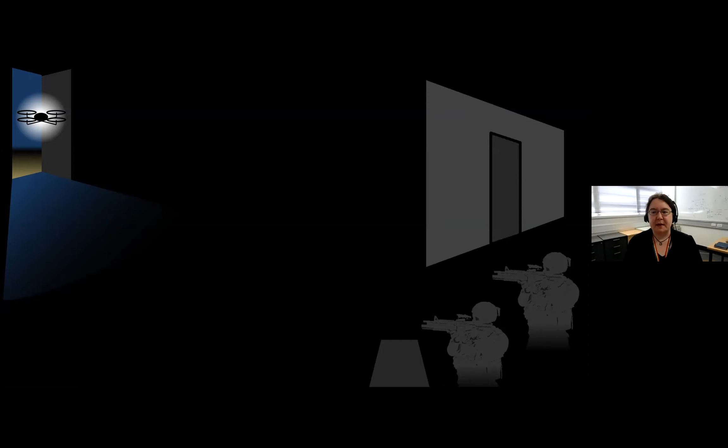Excellent choice, one that I certainly prefer myself. But this is a more complicated scenario than some of the sanitized approaches we may be used to. For instance, there might be obstacles and cover hiding our targets. There might be walls, doorways to navigate, branching corridors to deal with. We might have furniture and other obstacles in the space. And if it's a tactical scenario, there might be smoke or gas or some sort of particulate obstruction. All of this becomes very difficult, very fast.

We have a complex, compact, sensor-denied environment. There's no light, limited vision, no map, no GPS, and very little time to think. You're not just dealing with a room that needs to be mapped—you have an alert and non-complacent adversary. Your opponents will actively respond to try and stop your drone incursion. So your unmanned system has to be both smart, capable, and prompt.

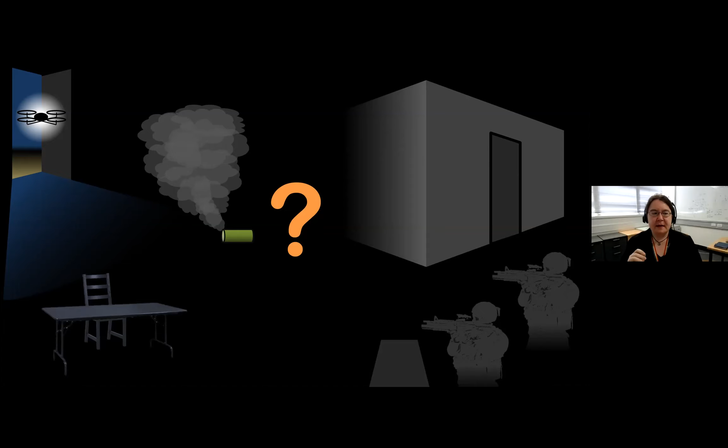So the intelligent approach to this, of course, is to festoon sensors onto our drone. A plurality of sensors: scanning LiDARs for mapping, cameras for object identification, radars for navigating through smoke and particulate obstacles. All of that requires heavy-duty computation—multiple core processors with dedicated pipelines for computer vision, tracking, SLAM, and person recognition for when we find one. This requires a seriously capable platform.

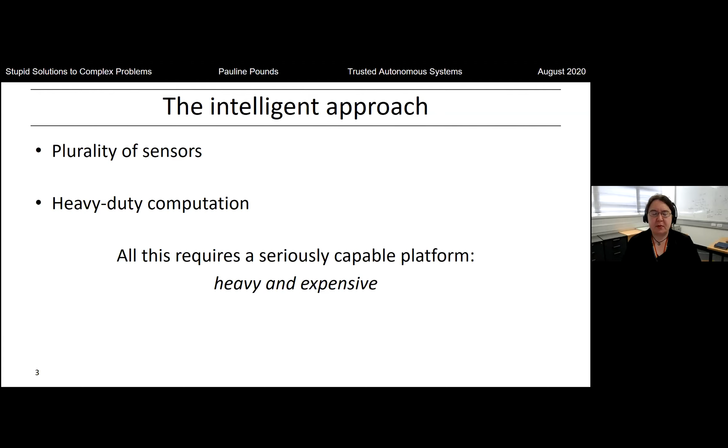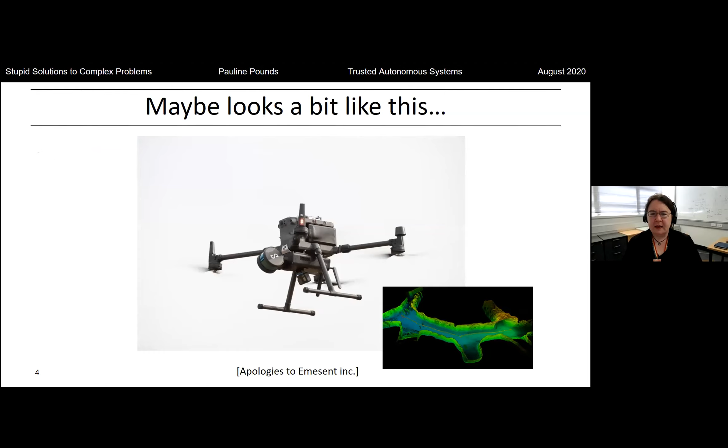This is going to be heavy and it's going to be expensive. And with apologies to my very good friends at Emesent, you might think it would look a little bit like this—a fairly large and quite high dollar figure drone, but extremely capable. It can navigate autonomously and give you exquisite maps that tell you everything you ever wanted to know. The problem, however, is that even with an intensely capable platform like this...

It can still potentially be defeated by a hippie bead curtain, because your LiDAR didn't pick it up especially well. You weren't sure if it was fog, some sort of cable, or a clear pathway you totally didn't detect. And now your $200,000, $250,000 platform has been brought low by something you can buy for $2 at the local op shop. That's not a great look, and it's very expensive to learn that in the field.

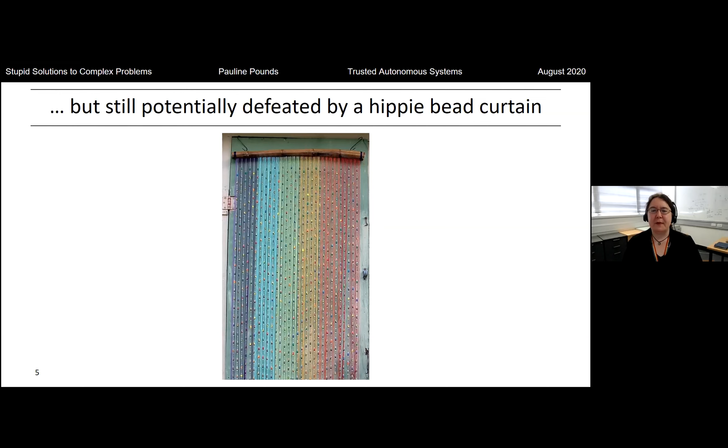As technical people, we like to think we can solve all problems just by building really smart robots. And that's a great approach to take in general, right? It's safer, faster, less expensive and less risky than putting a human into that room. Fantastic. And there's sort of a bit of a conceit that we have that more intelligence equals more better.

But intelligence has drawbacks too. It's expensive to design, build, implement, and operate systems with high intelligence. Computer systems are heavy and fragile—they very rarely like to be dropped. And they're also potentially brittle to unforeseen circumstances. If you haven't programmed it in before the mission starts, it's very difficult to build a system that will be flexible and adaptable on the fly. That's one of the key topics robotics is addressing as a field these days.

So, okay, well, this is a really hard scenario. And we might be tempted to say, cool, some problems you just can't solve, right? Case closed, great, see you at the coffee break. It would be a really short talk if I thought that was the case.

So I'm going to switch it up a little bit, and I'm going to introduce you to a friend of mine. It is humanity's deadliest predator, because we kind of know that there's a solution to this problem. And here he is, there in the center of your screen. I don't know if you can see him—we'll draw a line around him there. There he is. You might be familiar with him, in fact. He's got 100,000 neurons. He's killed billions of humans.

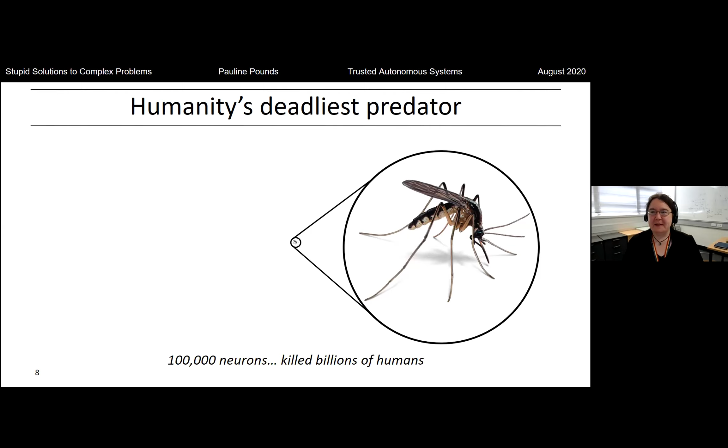In fact, by some reckoning, mosquitoes have killed about half the humans who've ever lived, through malaria viruses and parasites, which is a heck of a thing for a flying platform. I mean, that's really good value for money.

But no one would say that a flying insect is smart. Even at the low end, our good friend the Aedes mosquito has 100,000 neurons. Slightly more complex, but with roughly the same number of neurons, is Drosophila, the fruit fly, which also happens to be the most complex connectome that science has completely mapped.

Slightly more complex again, although I haven't found an exact strict number for this one, we have the common housefly, which is 250,000 neurons. But the intellectual heavyweight of all these flying insects is, of course, the honeybee, with just shy of 1 million neurons. But by no measure would you say the honeybee is a smart platform, not compared to humans.

Human beings, for reference, have about 86 billion neurons. So there's a bit of a step between the two. But some food for thought.

Have you ever tried to swat a housefly and missed? Your brain is massive compared to that of a housefly, and yet try as hard as you might, you just can't get the thing. And I'll give you a hint: it's not because you're physically incapable of doing it.

A housefly typically flies at only about 7 kilometers per hour. That's a brisk walking pace, right? You can get there if you're on target. The answer as to why you can't is because not only are they extremely maneuverable in their flight patterns, they're also much faster at thinking and reacting than you are. Very fast sensing, very fast response. And they're cheap, because flies are everywhere, much as we wish that they weren't.

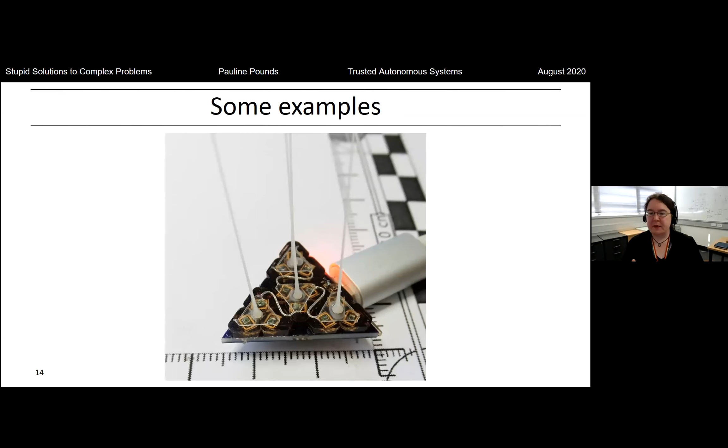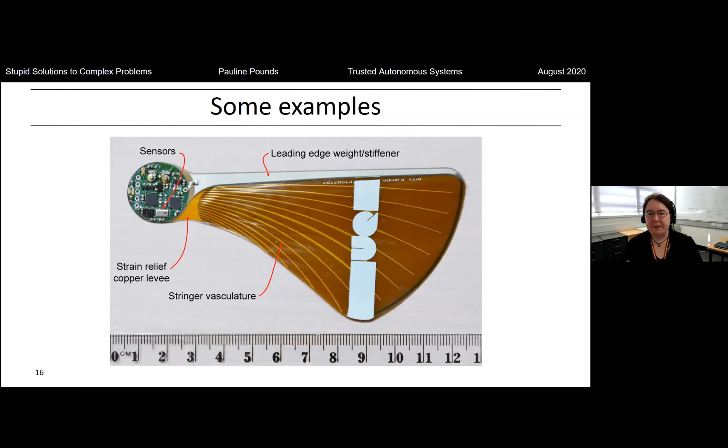I'd like to give you some examples of the systems I'm developing that encapsulate this style of thinking, focusing on the physical end of intelligence embodiment. Some examples are contact whiskers for measuring the environment around you, rotor sensors for measuring velocity of aircraft through the air, disposable drones made out of integrated circuit material, and as a bonus topic at the end, bipedal locomotion, where we solve a difficult, complex embodiment problem by simplifying everything down to its elements.

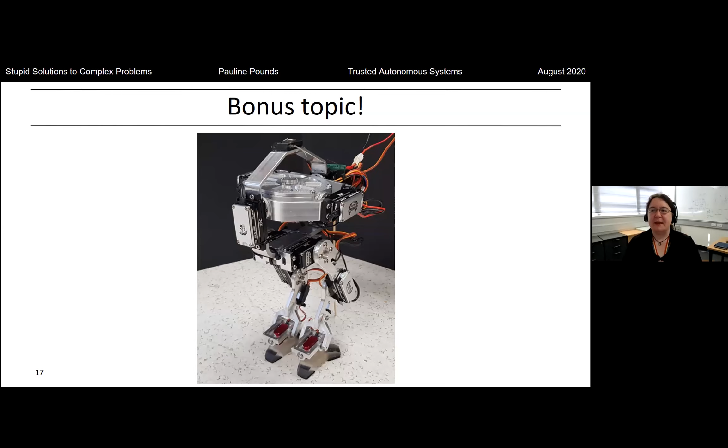So I'll go through them one at a time, starting with my whiskers, contact and pre-contact sensors. I like describing whiskers as reaching out and touching someone without necessarily having to be close to them. Contact proximity sensing is absolutely critical for robots moving through an actual physical environment.

If you're in a cramped and cluttered environment, contact with something may result in a risk to the robot. There are lots of natural examples of autonomous systems using whiskers to navigate through compact spaces, find prey, sense vibrations of potential adversaries or food, measure the velocity of an animal through the water, and even measure the angular velocity of a flying insect with a specialized type of whisker called the haltere.

For drones, we're very interested in using these capabilities because they give us a way of getting fast, early sensing about a potential contact when that contact force will be low, rather than during a hard contact where the contact forces may be high and damaging.

Our goal is to navigate our microscale aircraft, about a 20-gram platform, through dark, dusty, cluttered environments where heavier sensors are simply not going to be a feasible approach.

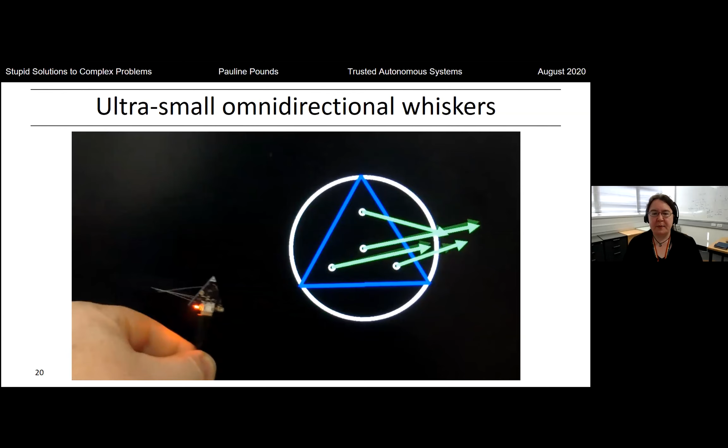If we succeeded in it, it might look a little bit like this. It would be nice if we had the capability of contacting surfaces and getting a measurement back from our device, giving us orientation and relative contact force. It would be great if we could do that as a complete array of sensors giving us not just an individual measurement, but a collective force flow field for the environment we're in. It'd be even better if we could have some kind of visual feedback to the user that we'd be able to make sense of.

Of course, interpreting that information for a robot is an additional task on top of that. So that seems a bit unrealistic, but we'll give it a go.

So how would we build something like that? First, you need to measure force somehow, and sensors that measure forces can be an excellent way of capturing that information. But the problem is how do you translate a physical contact with an environment into an electrical signal you can measure? This has been a topic of study for roboticists all the way back from the 70s. Some very clever people at Harvard University, working with Rob Howe, hit on the reality that force over area is equal to pressure. We already have really good sensors for measuring pressure, and they're called barometers.

In fact, we use barometers in drones all the time to measure altitude. So they figured, why not take some of these sensors and see if we can turn them into a force sensing device? It was a great idea. We took that idea, realizing they were onto something, and ran it to its logical conclusion.

We got a very small MEMS die. Rather than just being a barometer, we exposed the die itself and embedded it within a flexible medium. Here you can see a Bosch BMP280 MEMS barometer. The little tiny green thing in the center is the pressure transducer itself, gold wire bonded to a circuit board material underneath that gets soldered to the rest of your circuit. Normally these come with a little protective housing, but we've removed that. They are really tiny, on the order of about 2 to 2.5 millimeters a side.

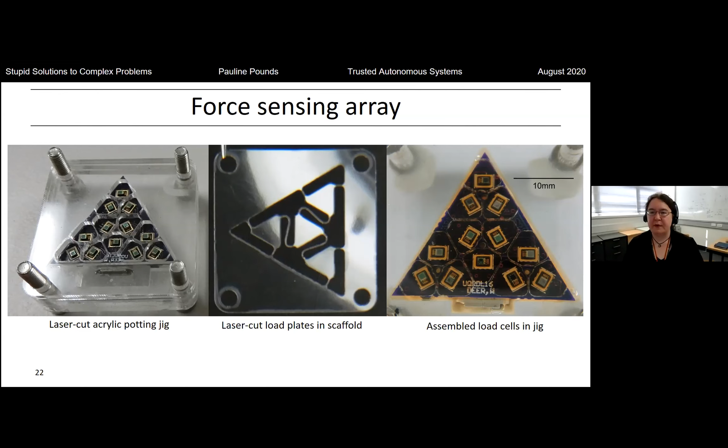To have some whiskers, we needed to come up with a way of fabricating easily controlled flexible polymer material that we could bond to our load cells, with multiple different lengths that we could control. And it's important to control not just the length, but also the thickness of the material.

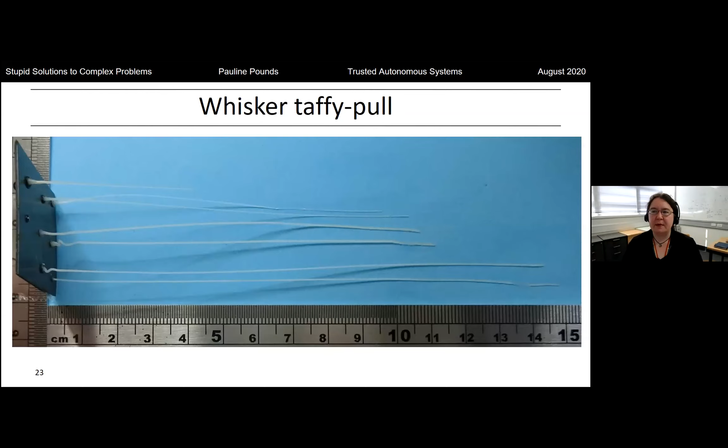Our solution for this was to modify a 3D printer to act as a bit of a taffy-pull machine, for those familiar with pulling taffy, where we put a dollop of hot ABS plastic on the load plate and then draw the head away from the surface. That causes the plastic to stretch out and become thinner and finer as it moves away from the base. This way, we're able to get very repeatably 0.4 millimeter thick fibers.

Now those little load cells are great, but to get the most out of them, you really want your fiber to be acting as an amplifier. So our configuration is to put that fiber right in the middle of our tripod configuration.

Each of our pressure elements is able to measure really minute forces, but we can always increase its sensitivity by making the whisker longer. The way that works is we have our MEMS pressure transducer inside the potted polyurethane material. The encapsulation is about 1.5 millimeters thick. That's all loaded onto a circuit board, itself about 1 millimeter thick. There's a microcontroller underneath that takes all the signals and does the processing. And there's a load plate that sits on top.

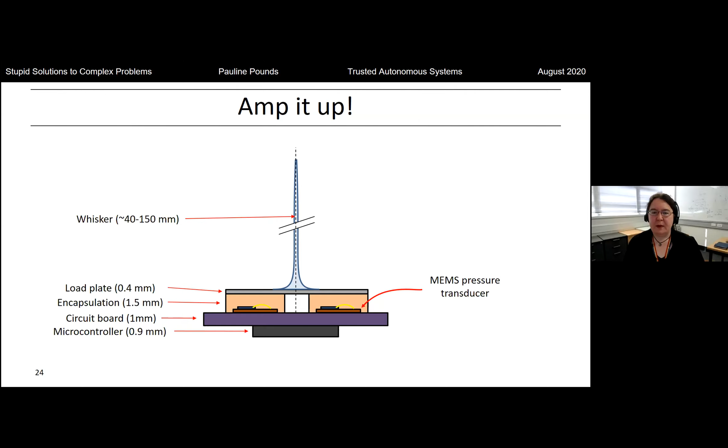Our whiskers will be about 40 to 150 millimeters long. So when we add forces to the tip of that whisker, it will translate that load into a pair of force moment couples acting on the load plate. Since we know the displacement of the fiber from the center is about 4 millimeters, and we have, say, a 40 millimeter long whisker, that gives us about a 10 times transmitted force coupling. Longer whiskers will give you higher force readings for smaller applied forces.

Now, these fibers wouldn't be much good if they just contacted something once and broke, so we decided to torture test them. We've tested them on a special machine we configured just for this type of testing, where we've basically taken our fibers to 1 million cycles, 10 to the 6, of just poking the fiber over and over and over and over.

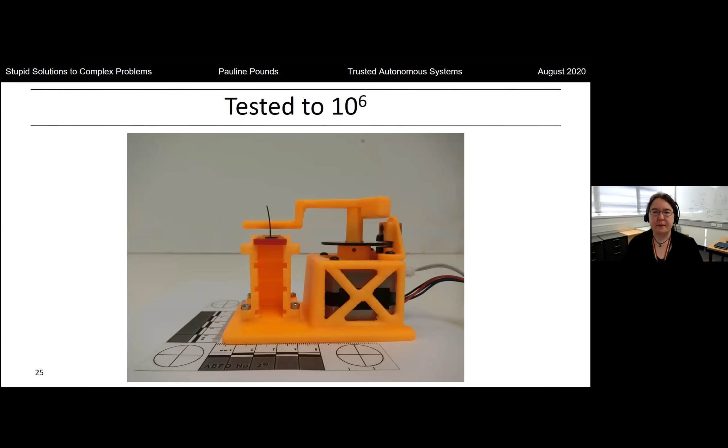So we can use these sensors to measure the small forces acting on the fibers as they move through air. This is something very important for our application with drones. So we've implemented a whirl tower, which is just a rotating swing arm that circles around with our whiskers out there on the tip, moving at about 6 meters per second.

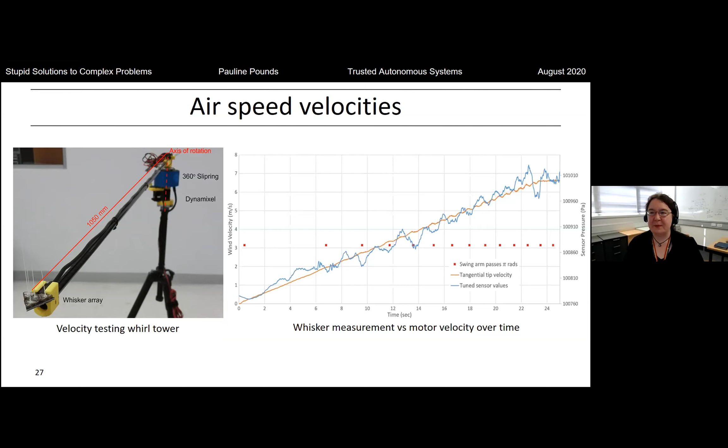You can see that the dips of all of those cycles line up with the swing arm going past pi radians, so we think we could calibrate that out and get a smaller oscillation. But it's really interesting to see we're actually measuring the mass of our own minute fibers as much as we're measuring air. Overall, the trend is nice and linear.

These things are also sufficiently sensitive that we can do some interesting, what I'd call a party trick. If we set our whisker up to cycle around and swing past our fiber, that swing arm now has a load plate on it. When the bow wave of air being pushed ahead of the plate strikes the fiber, it will read a deflection in force.

I'm going to play that again. So here it comes, and even before it contacts, it reads the threshold value and turns on its light. It can measure that incoming contact about 0.063 seconds before it hits, and that's fast enough for your drone to take some sort of evasive action or apply a safety mechanism.

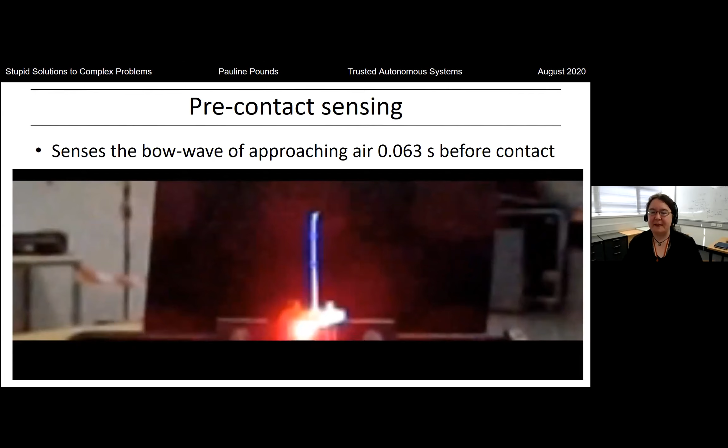So this is just a very first attempt at it. We think we can do better. But I think it's kind of interesting to see that as a proof of concept, we're able to actually measure contacts without contacting anything at all.

So how would we use this? Well, proximity contacts of actual touching objects in the environment, pre-contact sensing, and flow fields—that's a whole bunch of information that you can pass back to a pilot or process through an autopilot in order to do obstacle avoidance.

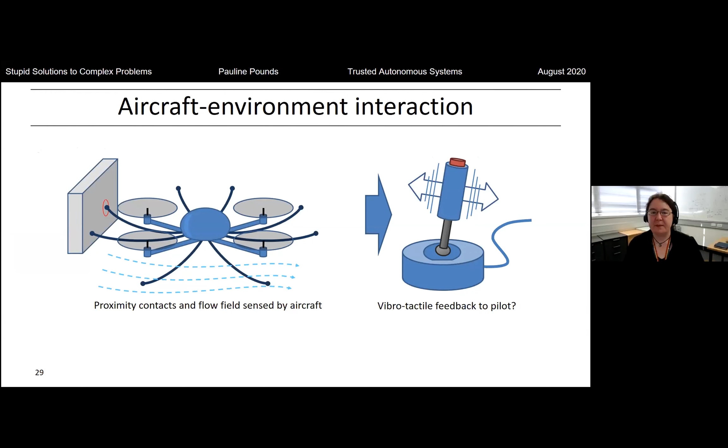And that's the approach I'm taking to some of the work that I'm doing with the fellowship with TAS. So it's good value for money as well.

It's only $30 for these tiny little systems. They're not very difficult to put together, and there's not a lot of meat to them. At 4.3 grams, even the smallest drone is going to find that pretty easy to carry around. At $30, that gets you 4 of these sensitive whiskers. It gives you USB and UART interface measurements at 150 hertz, with 13 discrete sensor measurements—the 12 of the tripods plus an extra one for thermal calibration.

You could expand these to massive arrays of thousands of these modules. Basically, you're limited only by what can be supported by the USB interface. So you can coat your whole house with them, or perhaps your jet trainer if you wanted to measure incipient stall on the surface of your wing, so that your pilots in training can be informed that they need to correct before they actually put the aircraft into a dangerous configuration.

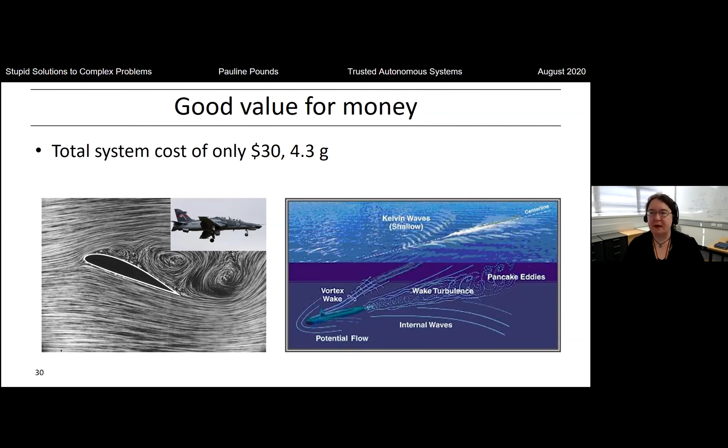Or you could put them all over your submarine. That's pretty important if you want to be quiet, if you want to navigate in turbulent waters and you don't know which way you're being moved. Being able to capture that information with a high degree of precision is something no one has the capability of doing at the moment.

All right, moving on from there, I want to talk about rotor force sensors, which are a very similar concept, trying to do a similar task, but using a very different approach to how you understand the forces in the environment. People who work in drone flight control will be aware that the fundamental task of any drone is controlling your position, your velocity, and your acceleration.

Everything else you do in terms of your mission or your higher order operations depends upon your ability to keep yourself on trajectory. That requires you to be aware of things like gust rejections, wind acting on your aircraft to push you off course. And if you can't do that, it's not very difficult to go from a meter away from a building to being against that building and in pieces on the ground.

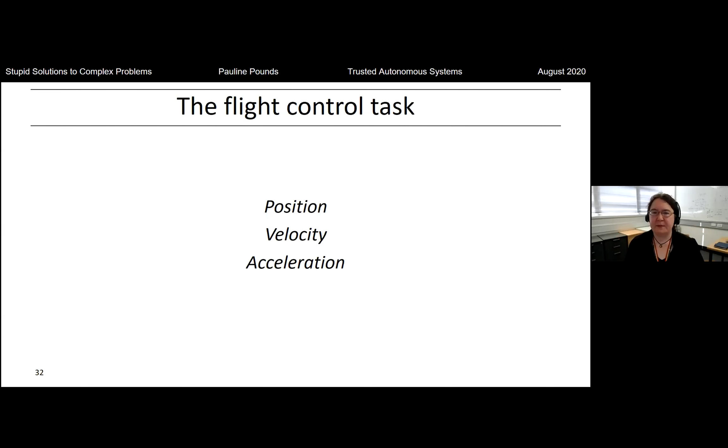It happens very fast. So the gold standard, the state of the art for aircraft navigation like this is what I call the big pink cheating room.

The big pink cheating room uses a whole bunch of beautiful IR cameras that flood the area in specially structured light, captured by an array of receiving elements that take reflections from optical markers put on top of your aircraft, and turn them into a spatial estimate of your position within that volume. From that you can get velocity, from that acceleration. It's very fast, about 1 kilohertz, and very accurate. It's really the ground truth for any experiment you do with this.

And that's fantastic, except that it doesn't work outdoors because we are defeated by our old adversary, the sun. It turns out the sun is an enormous infrared transmitter, and if you have a sensing technology based on infrared light, you're going to struggle anytime you aren't indoors, under heavy cloud, or at night.

So how do we work around this? It's great for fancy YouTube videos, but most of what we want to do is outdoors and very often in the day. And unfortunately, there's really no good alternatives.

There's no what I call universal sensor. GPS is great for getting you position, but it's slow and a little bit imprecise depending on what configurations you have and how much you're prepared to pay. It's also unreliable because if you're flying in urban canyons or under heavy cloud, you very quickly run into situations where you're just losing your lock entirely.

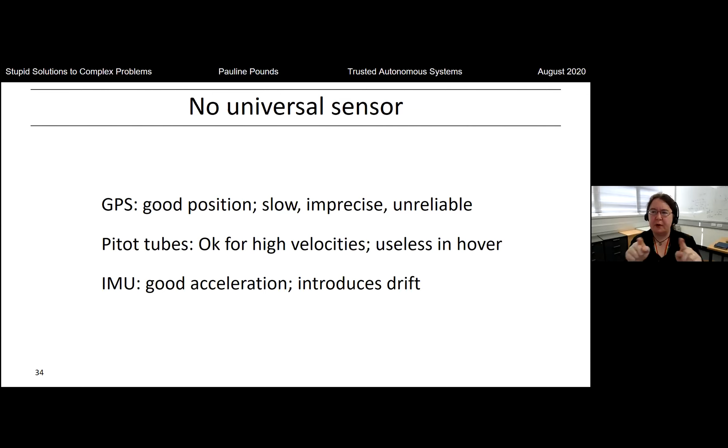Well, all right, there is a relationship we can use though. If we have position, we can differentiate for velocity. If we have velocity, we can integrate for position. If we have acceleration, we can integrate for velocity. If we have velocity, we can differentiate for acceleration. So really, if we have velocity, we can get both of those with only one dynamic order step. What we want is a velocity sensor, I think.

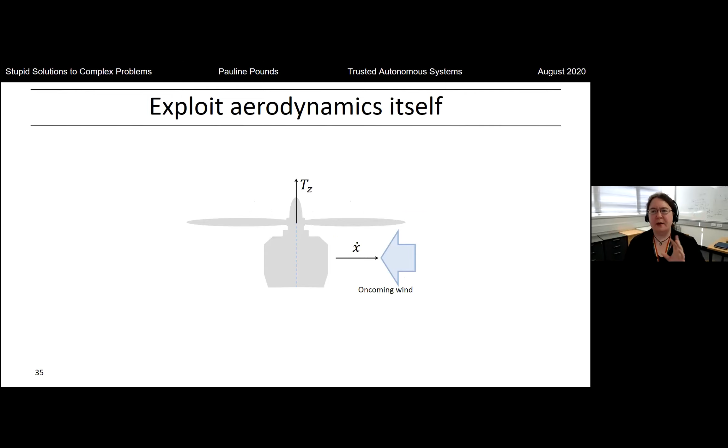What if we exploit aerodynamics itself? When you have an aircraft in hover, your rotor provides thrust that keeps the aircraft in the air. If we have a lateral velocity through the air, it's going to push back against the rotor. We know from aerodynamics models developed for multi-rotors that there's an equation linking the lateral force acting on a rotor to a bunch of parameters based on our thrust and our translational velocity.

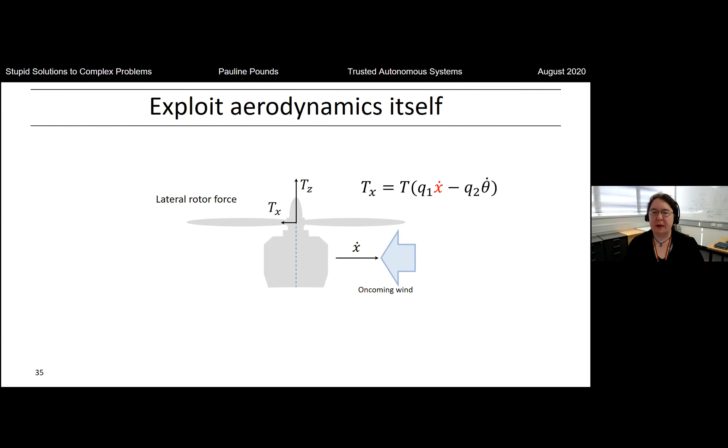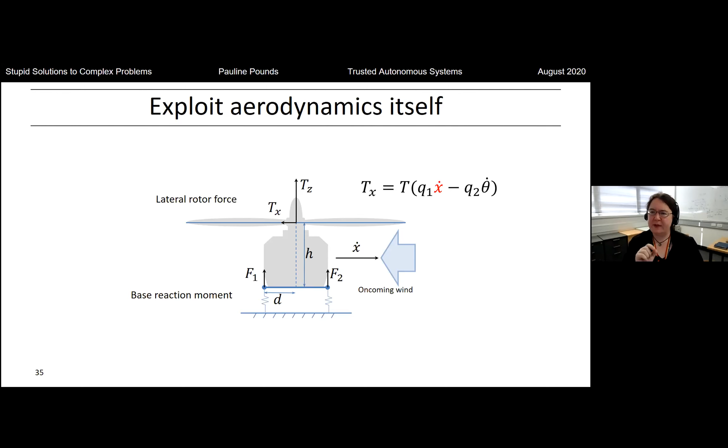If we could measure that lateral rotor force, we could back out that oncoming wind. So what if we put a mounting system on our motor? That way, if we have a displacement from the rotor head to our mounting system, when we apply a force at the rotor from the rotor thrust, we're going to get a force couple back onto that mounting point. At this point, this probably looks very familiar, because it's basically the same thing as what we did with our whiskers, except this time we've put a motor on top and a rotating unit on it.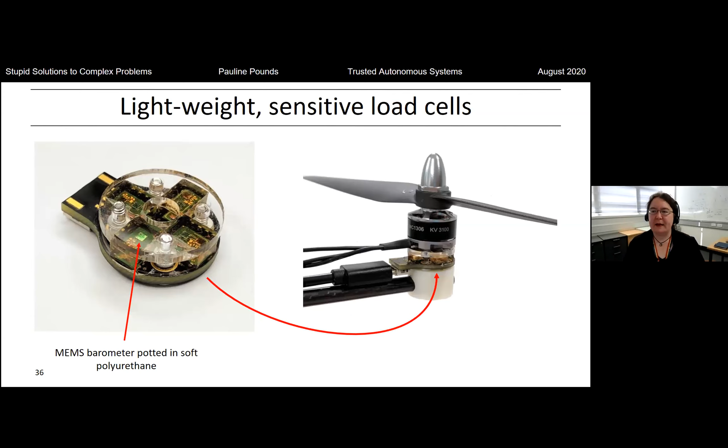So there's our MEMS barometers potted in a soft polyurethane, but this time running at a much faster speed, about 1 kilohertz each. They're configured so that the thrust is generated vertically, and we're measuring couples across the lateral and longitudinal axis of the aircraft.

So we can bench test this load cell we've developed. We've got a JR3 load cell, about a $5,000 unit, put it on a long swing arm with our motor on the end, and put a test load at the point where the rotor would be. We've just increased our test load by filling a cup with water. The length of the lever arm is configured so that the relative torque scales of the two devices will be within the dynamic range of those units.

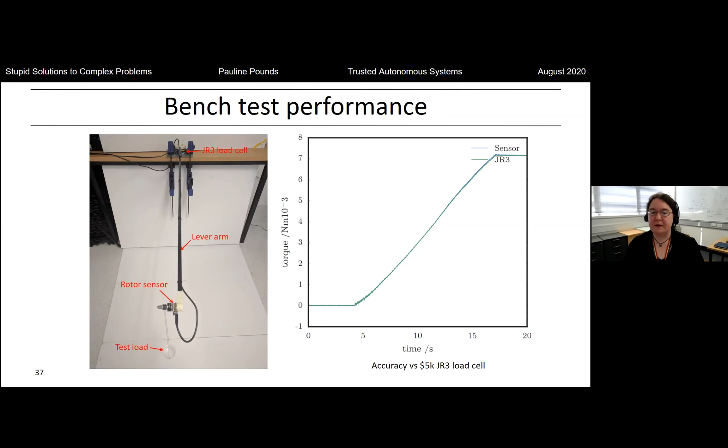This graph on the right is not actually a single line, it's actually two lines. One is the measurement coming from our sensor unit, and one is coming from the JR3. As you can see, they're practically spot on. So we're basically reproducing the capabilities of a $5,000 sensor with our little tiny rotor unit.

If we turn that onto our swing arm rig again, and this time bring our rotor up to speed, we're acting as an aerodynamic amplifier of sorts. The more thrust we produce, the greater the signal will be translated into the lateral force component of our sensor. If we spin our rotor arm around at about 0.53 meters per second, you can see very clearly in the direction we've mounted it that the signal will increase. That's that big step in green.

But what's also very interesting is that when you start changing your rotor velocities in translation, you also read a change in the force being generated vertically by the rotor. We can actually measure that too in that red line. There's a very small dip. And to us as aerodynamicists, that's super exciting.

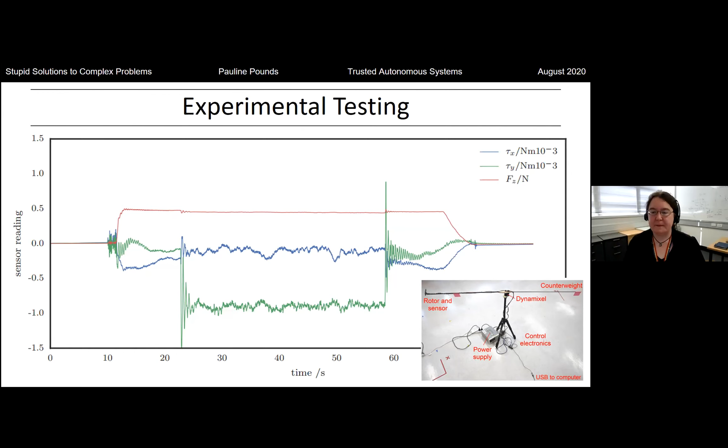In fact, it's so sensitive that we've kept having problems, because if the air conditioning in the room was turned on, as it would go around a complete circle again, our old friend the sinusoidal superposition would show up once more. We said, aha, we know what this is, but what on earth is this cross calibration? We knew that our aircraft was totally level. We knew that our swing arm was properly configured.

We knew that sometimes it just didn't show up and everything was clean. Then we realized that on the days the air conditioner was on, we had the problem. When it wasn't on, it went away. We realized that, again, the frequency of rotations was matching the sinusoidal period. As soon as we turned the air conditioner off, we knew we'd had it solved. Now, the air conditioning draft in our office is very, very minute. We couldn't even tell unless we actually inspected the panel, but this is capable of detecting it.

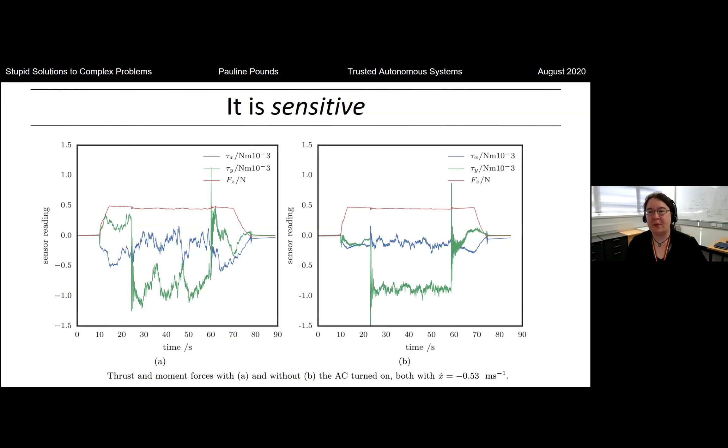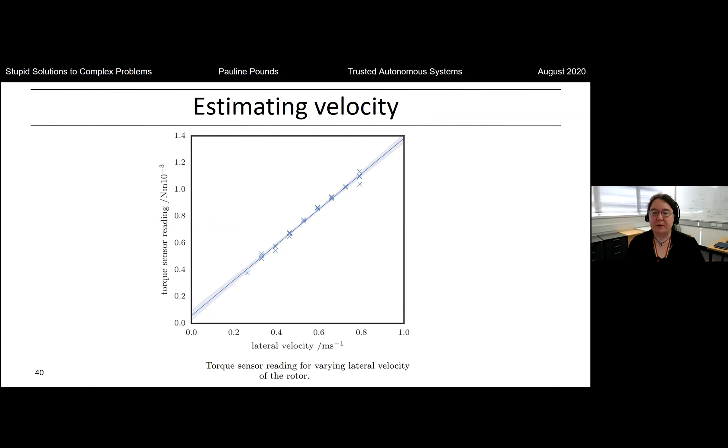So we're very interested in the linearity of our measurements. We know the applied lateral velocity from the swing arm times its swing arm speed times its arm length. From that, we compare against the sensor torque reading that we're getting. By putting that into a rotor model, out will pop the translational velocity as an estimate.

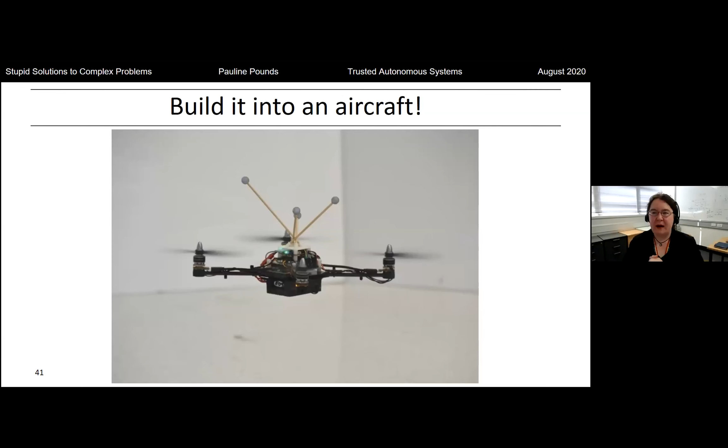Brilliant, let's build it into an aircraft, because it's no interest to me to have it sitting on a shelf or on a swing arm. I want to see it actually fly. So the data we get out of it is not just data from a single rotor. Instead, we have these sensors on every single rotor of the aircraft, and they're connected together by a small Raspberry Pi module that collates their information and runs the estimator algorithm.

We have 16 sensors that we devolve into couples of 2, and then a vertical velocity. So you can think that X is being measured by 2 force couples, Y is being measured by 2 force couples, and together they give you a Z component. So 4 times 3 measurements per rotor gives you 12 parameters.

We have a 6DOF dynamical model for roll, pitch, yaw, X, Y, and Z. So we have a 12 by 6 matrix pseudo inversion. For those of you playing at home, you can't do that unless you make some assumptions about how your pseudo-inverse will happen. But if you turn the math around very carefully and make some assumptions about the characterization of that, it'll work. Trust me on this one.

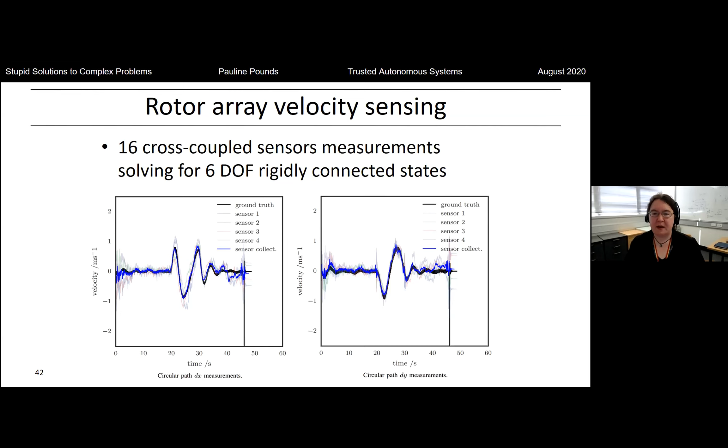Even under pretty extreme maneuvering—in this case our aircraft flying in very fast circles, doing a complete loop in about 5 seconds—right at the very extremes of those motions we get a bit more digression. We believe that's because our aerodynamic model is incomplete, but additional aerodynamic models will probably shore that up.

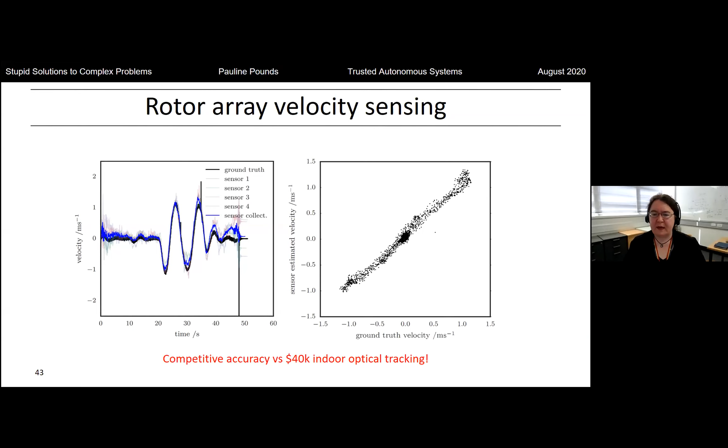So it's pretty competitive against your $40,000 indoor optical tracking system, which I think is good value for money, because it costs only about $200 to build a complete array of 4 of these devices for mounting onto a drone. And that's 40 grams as a mass burden for your platform.

Whether you're flying indoors, outdoors, over water, over ground, day or night, in smoke or in fog, these systems will still work because they're attached to the fundamental mechanism by which your aircraft will fly. And with 1 kilohertz measurements, you're actually able to get a higher order of feedback than you would through other systems.

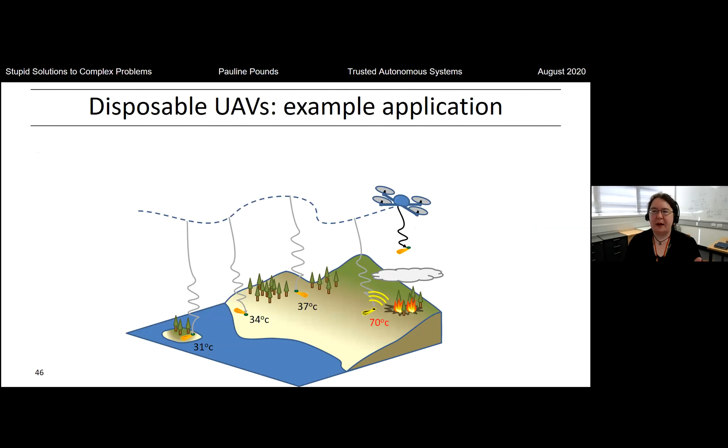I'm going to quickly step through disposable drones. We're very interested in having a mechanism for building drones cheaper, because we wanted to throw them into bushfires where they might get burned up. Parachutes would have been too expensive and they were very fiddly to produce.

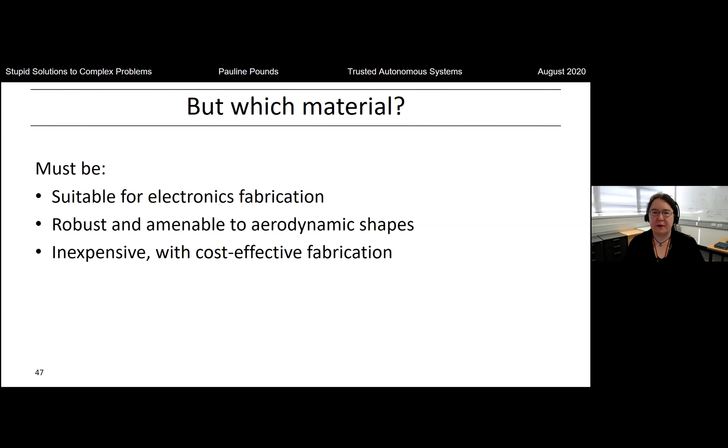It boiled down to what material we'd like to use. We needed something suitable for electronics and amenable to making aerodynamic shapes out of, but it couldn't be very expensive—it had to be cost effective in mass volumes. We had great inspiration from colleagues of mine at Berkeley and at Harvard who were producing folded origami robot shapes. I thought, we could do that.

So we hit upon polyimide, aka flex PCB, aka Kapton tape, aka God's tape, which was developed for the Apollo program, where they coated the lunar lander with it. People build complex circuits etched onto the substrate of the polyimide material. This is great because you can build the circuit board into the aerodynamic shape—you can put your flight control, all of your sensors onto that mechanical structure, and it will just work. You don't have to do anything more to it.

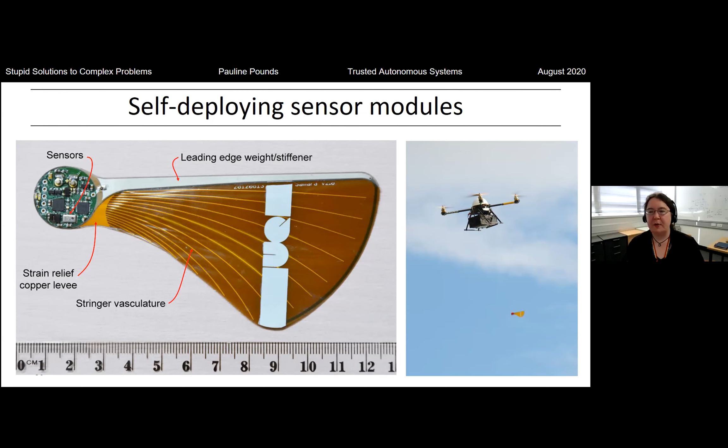In this case, we've built an example, a fully passive rotary wing aircraft that we can throw out the back of a drone, drop over an area, and get tropospheric measurements. It's kind of neat—this is a view of our sensors descending, and it works surprisingly well. Because they're fully passive, there's nothing to go wrong, and there's no range to worry about.

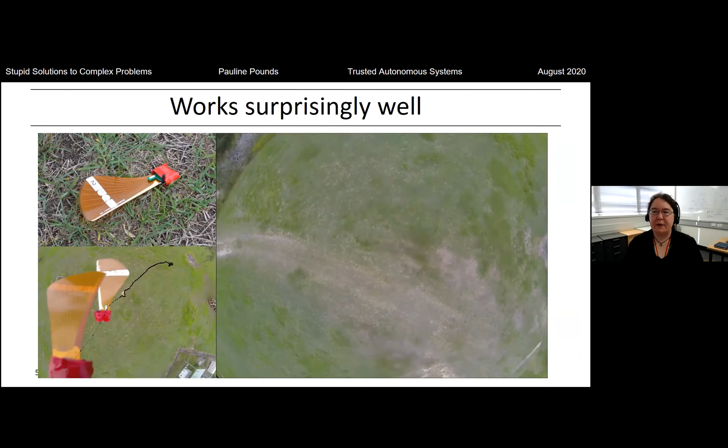You're not just limited to fully passive aircraft—you can build in steering, you can build in propulsion if you really want, it just comes at extra cost. So you can imagine a system like this, a super low-cost UAV with an onboard GPS module that could steer your aircraft to particular predetermined locations. And again, good value for money.

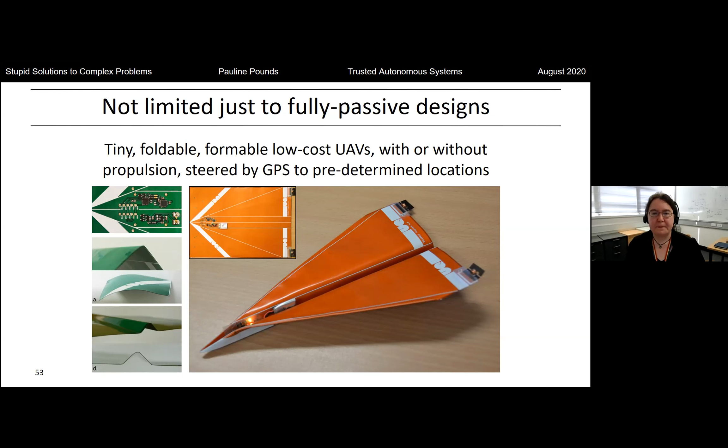We care a lot about that since we're building lots of these systems. If we can build them for less than $10 per unit, we could build 1,000 $10 drones instead of one $10,000 drone. We can even make them cheaper using biodegradable material like paper, with self-immolating materials like paper or shredded cardboard that could catch fire when we're done with them—presumably not if you're doing environmental monitoring for bushfire, since you probably don't want to start fires then.

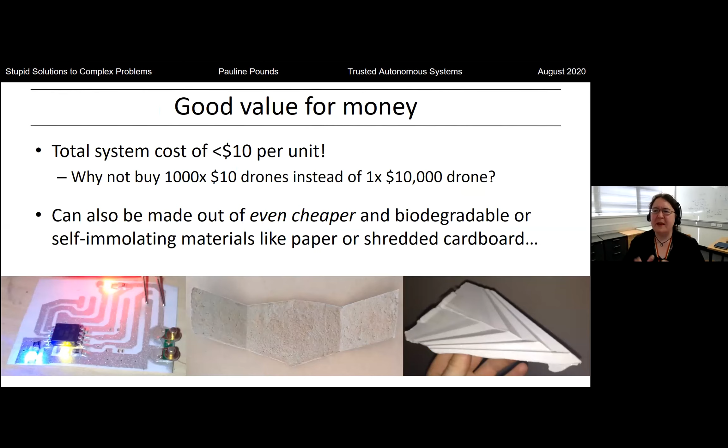So if we combine all these technologies we've just talked about, we start to get something that looks a bit like our old friend. We could have a super cheap, highly integrated, drift-compensated, fast-reacting micro-miniature disposable drone. We could give it passive embodied intelligence for avoiding obstacles by sensing contacts before they occur, using whiskers, and sensing wind speed in the environment. And we could do something neat like what a mosquito does, putting CO2 sensing or thermal sensing on it to detect humans in an environment.

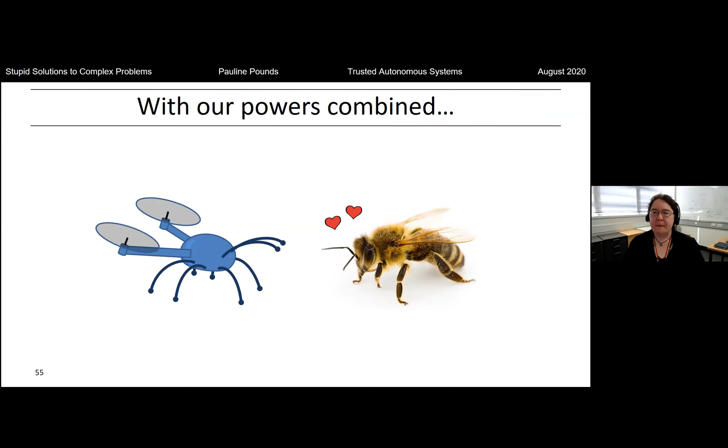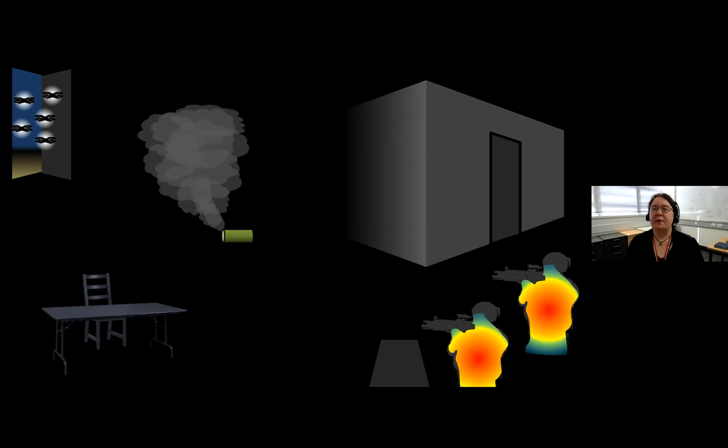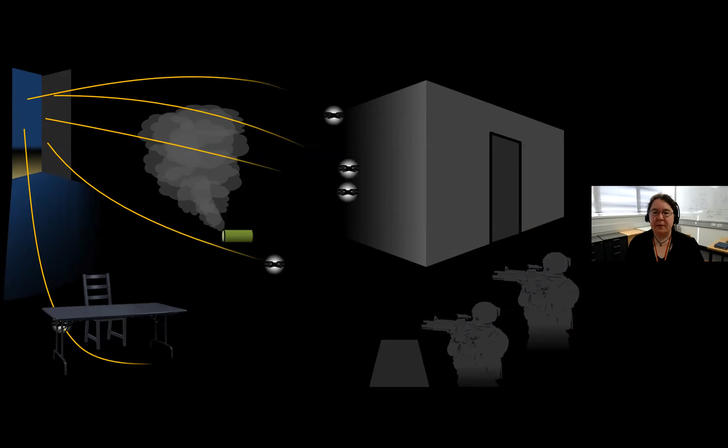And then we could play an interesting trick. Let's go back to our dark room. Now, instead of one UAV, we have a whole fleet of UAVs. We can have thermal sensors so that when they get close to a human, they can measure them by body heat, or CO2 sensors to measure proximity by gas cloud sensing, following the gradient to fly right to them. Now we can have them fly all sorts of trajectories into that space. And when they find a human, we could even have them cling to them and start emitting a beacon. Now your guys in the field will be able to say, hey, there's a noise coming from that guy over there—there's a guy there, okay, we can do something about that now. So that way you won't be surprised when you actually enter the room.

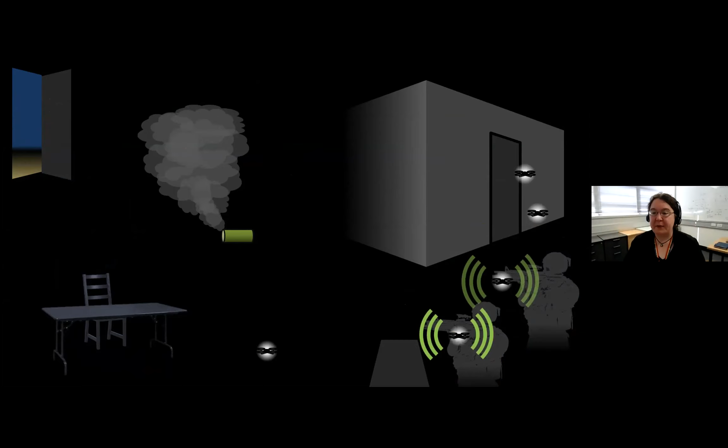With the little time I've got left, I'll breeze through bipedal locomotion. We want to build leg robots. This is the dream. Aerial robots are great, but they're no substitute for boots on the ground. If you want to carry heavy payloads, have long endurance, and keep pace with humans in human-built environments, you really can't beat legged robots. The world is constructed around bipeds because we're bipeds. So we'd like to build these for a variety of applications, to go places where drones either can't go or don't have the endurance to compete.

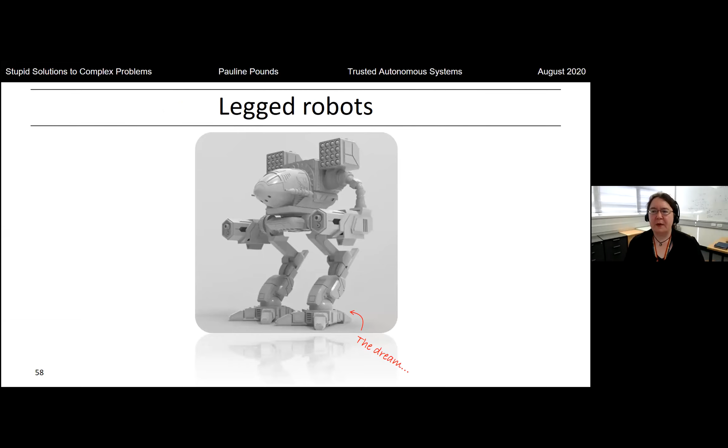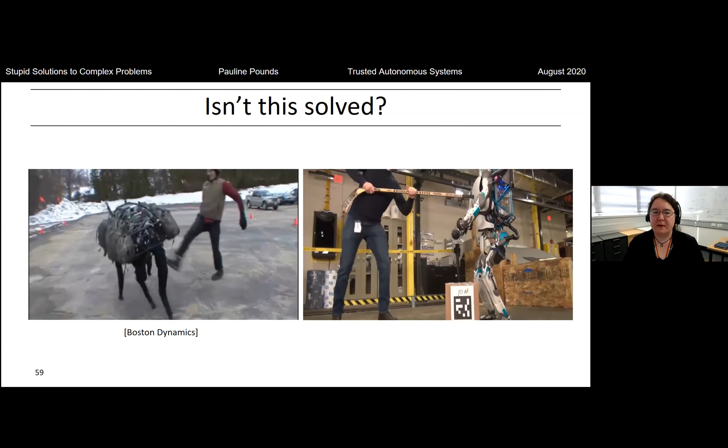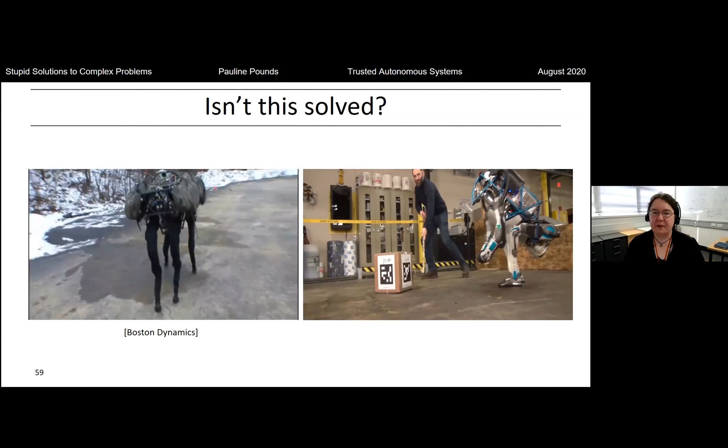You might ask, isn't this a solved problem? Boston Dynamics has built a long and fascinating career by being mean to walking robots, kicking them and hitting them with hockey sticks, and you might be inclined to think this problem's done. But if you've paid attention thus far, you'll probably understand where I'm going with this. Using legs to do that balancing control winds up being expensive—you need very capable sensors and very capable actuators, and it becomes prohibitive to build large numbers of these devices. So, eliminate the expensive bits, right?

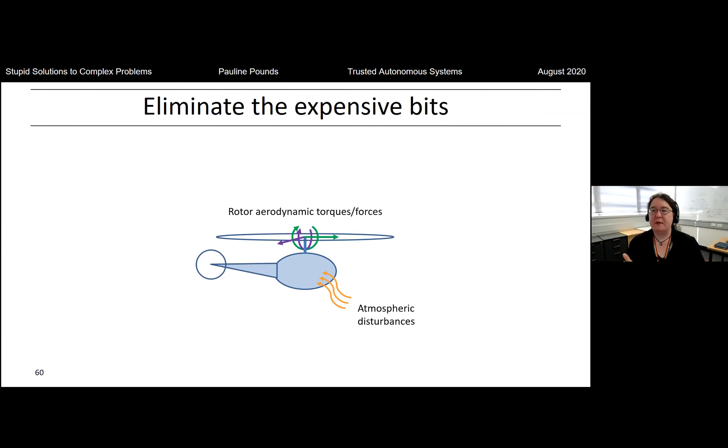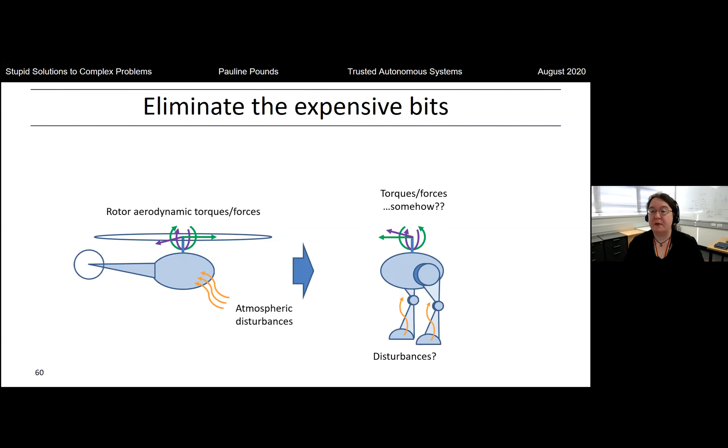Drones fly by using rotor aerodynamic torques and forces to stabilize themselves in the air and reject disturbances. What if we did something very similar? What if we used torques and forces, and just treated contact with the environment as a disturbance to eliminate? So our approach is to build a high-speed gyroscope into the robot, mounted on a pan-tilt rig, to apply torques in order to stabilize the platform. That way we can make it much, much cheaper, because now we've thrown away all the hard bits.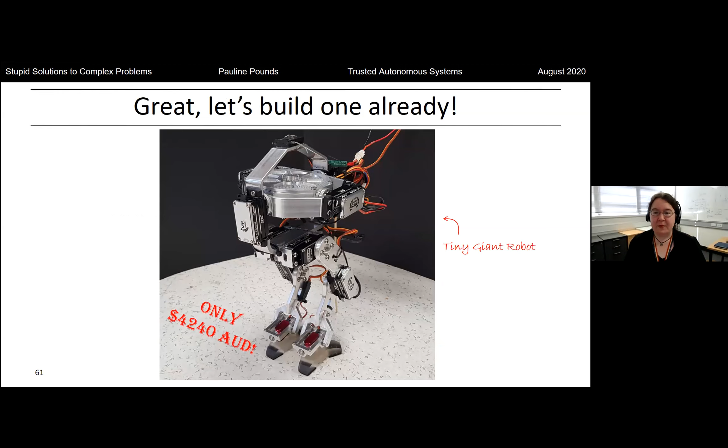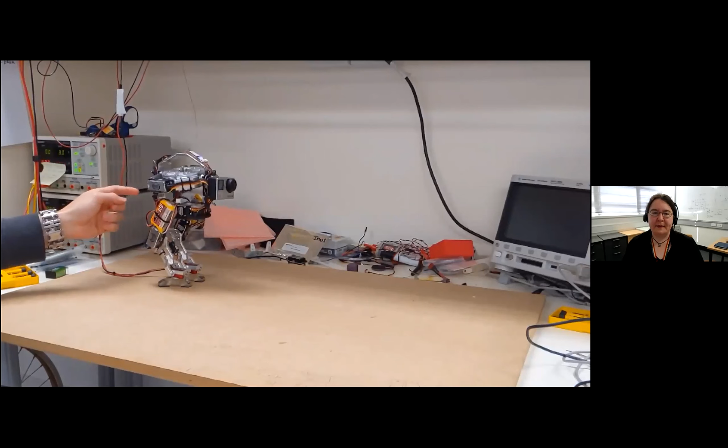I'll step past that video and bring you to this one since we're running out of time. Here you can see it balancing itself. We can be mean to it by poking it, we can give it bias loads. Now it's self-balancing and will correct automatically. If we take the load away, it'll balance automatically. And this is all being done with the same type of flight control system that's built into conventional drones you can buy off the shelf today.

We can even change the ground structure under it, applying a tilt both laterally and longitudinally, and we can apply an earthquake, which gives it additional forces entering through the feet. I'm very proud of that, because Boston Dynamics struggles at that task.

We can walk on the spot, and we can even walk forward. At the moment our walking speed is quite slow because we're being very careful—we need to make some changes to the feet, but it's become quite reliable. We can turn on the spot by applying a small twist to the feet as we're walking in place. So now we're at the point where we can basically drive it around as if it were a remote control car.

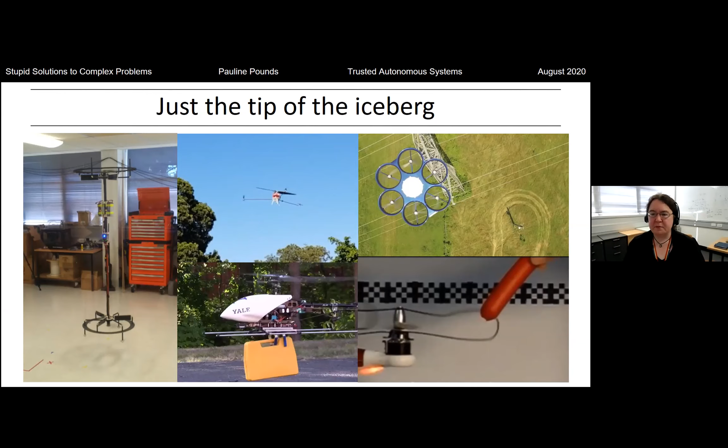All right, so that's just the tip of the iceberg that I do. I build all sorts of strange flying platforms and oddballs, new weird things. Everything from flying hat racks to triangular quadrotors to power line inspection platforms, to robots that grab objects and transport them, as well as safety systems. So if your robot's attacked by hot dogs, you can be safe.